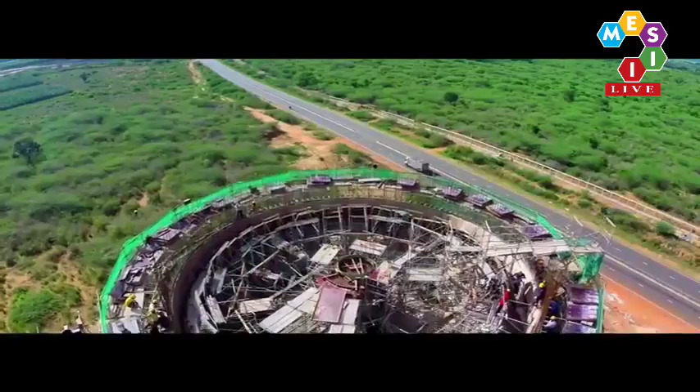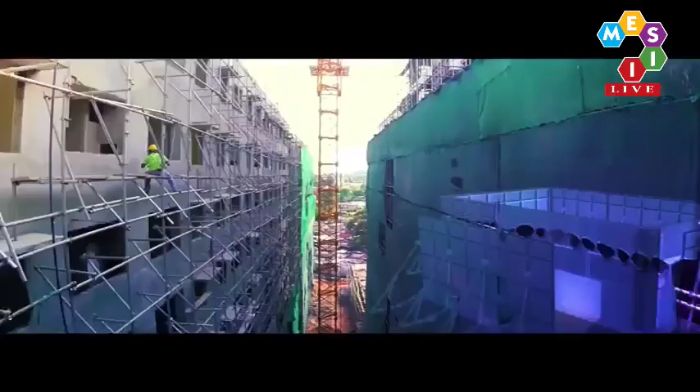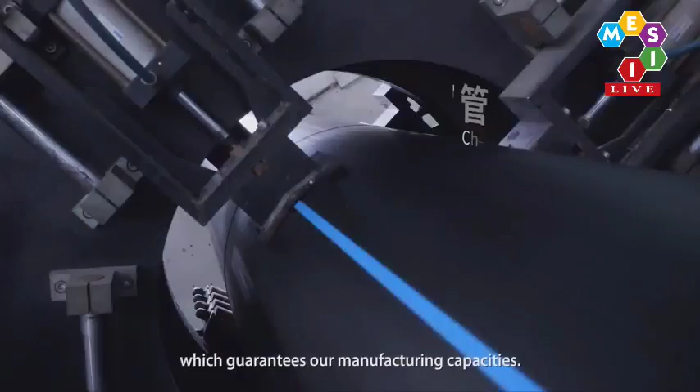The total quantity of our production equipment has been more than 3,800 units, which guarantees our manufacturing capacities. We can provide the market with a full series of products with calibers stretching from 16 millimeters to 2,400 millimeters.

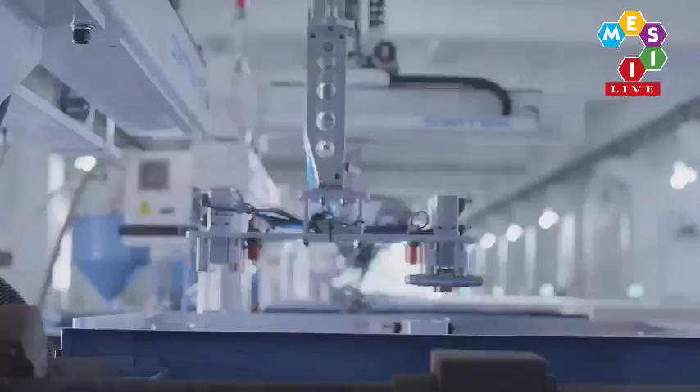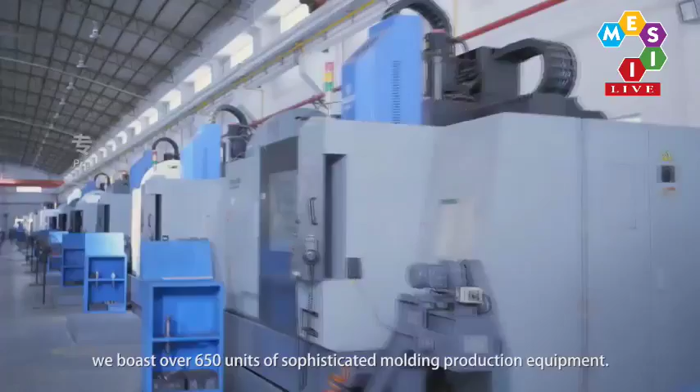Our annual production capabilities of plastic tubing and pipe fittings amount to 2.16 million tons. Over 650 units of sophisticated molding production equipment. Our annual production of molds exceeds 3,500 units.

By virtue of powerful scientific research strength, Lesso receives many national titles and honors, including National Recognized Enterprise Technology Center and Postdoctoral Research Workstation. So Lesso adheres to the brand philosophy of creating a relaxing life for dwellers by extending to

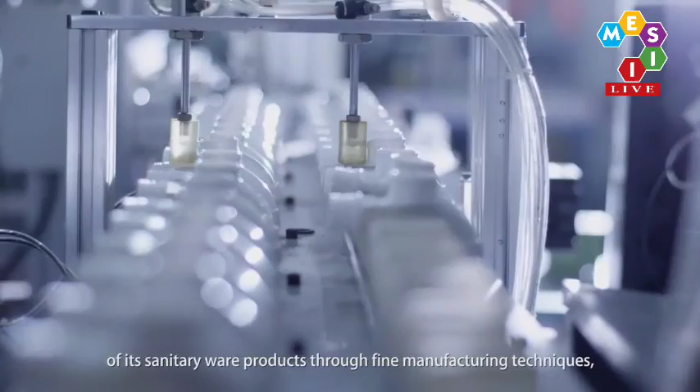the industry of building materials and interior decoration. Lesso is dedicated to enhancing the product quality of its sanitary ware products through fine manufacturing techniques, as well as bringing sanitary ware products with superior quality and taste to consumers.

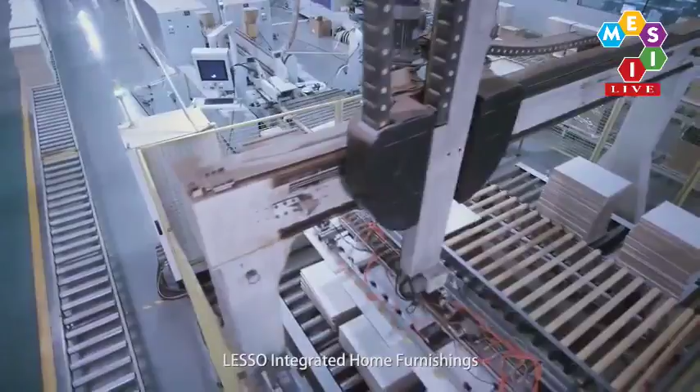By focusing on household and lifestyle requirements of consumers, Lesso Integrated Home Furnishings provides a full range of housing services, such as integrated kitchen and wardrobes.

Meanwhile, Lesso also operates a complete product line of building materials and interior decoration, including integrated doors and windows, decorative plates, integrated heating, water purifiers, and firefighting equipment. It comprehensively provides consumers with comfortable and satisfying housing services, provides integrated solutions of building materials and interior decoration.

In the future, Lesso will consistently stand at the forefront of the industry, gradually develop into a world-leading large industrial group of building materials and interior decoration, and create a relaxing life for thousands of families in China and the world.

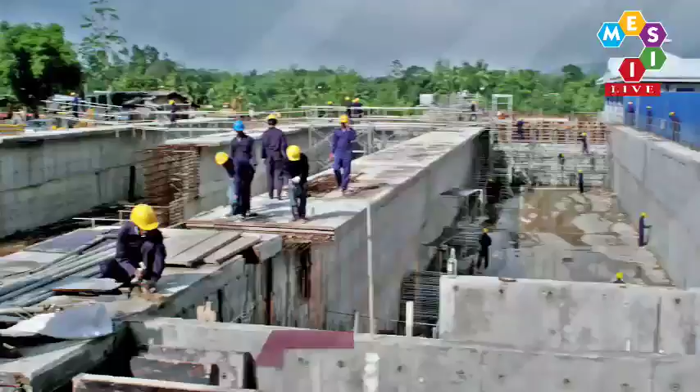The company will continue to be involved in building vital infrastructure around the country, contributing to the rapid economic development spearheaded by the government.

Our success story is well recognized. Today, we record the highest market capitalization in the construction and engineering sector. Whilst creating value to our stakeholders, we continue to enrich the motherland with our contribution for the well-being of generations to come.

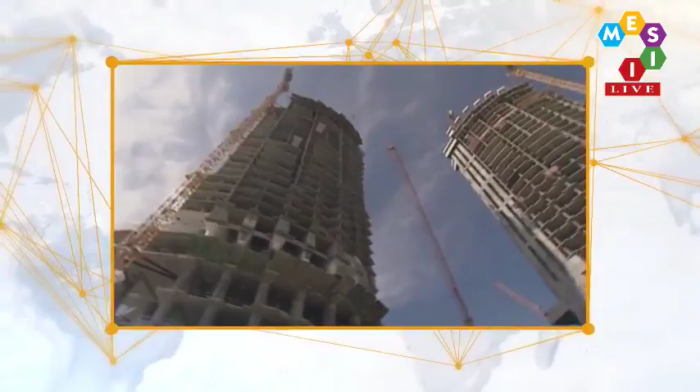Master Builders Solutions by BASF connects the entire global expertise and innovative strength of BASF to develop solutions for more than 30,000 clients everywhere in the world.

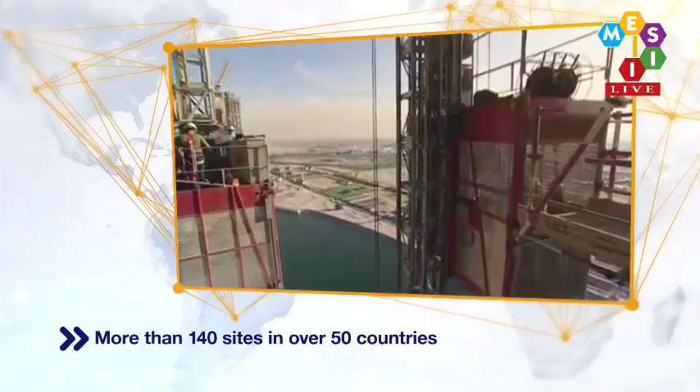Supporting more than 140 sites in over 50 countries, we receive and dispatch a customer order every 5 seconds on each of the 5 continents, being always close to our clients.

With Master Builders Solutions, we can bring our global expertise to each local point in the world, enabling our clients to benefit from more than a century of BASF's knowledge and experience within the construction industry.

We've led innovations and set standards for decades, and we will continue helping our clients to break records in construction with peak performances from the tallest buildings to the longest bridges in the world.

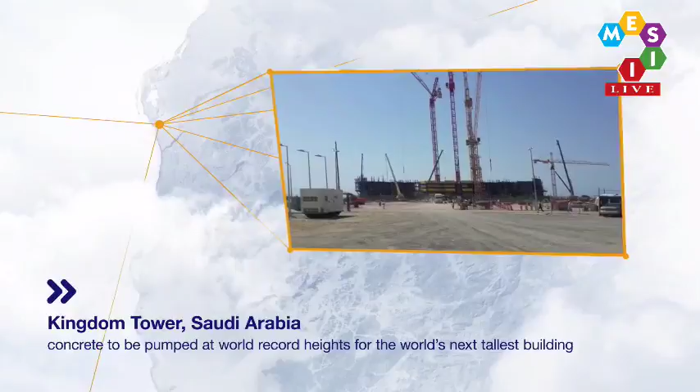With Master Builders Solutions, we support our clients in finding the most efficient and sustainable solution for each of their projects. But building a sustainable future needs more than just chemicals.

It needs good chemistry. We believe that only as a truly connected team across various functions, professions, and countries, and in close partnership with our clients, we will achieve results.

Whether it comes to technical services, long-term support, or yet unprecedented challenges, Master Builders Solutions from BASF is the world's most experienced and best connected partner for expert users of construction chemical solutions.

Master Builders Solutions from BASF. We create chemistry.

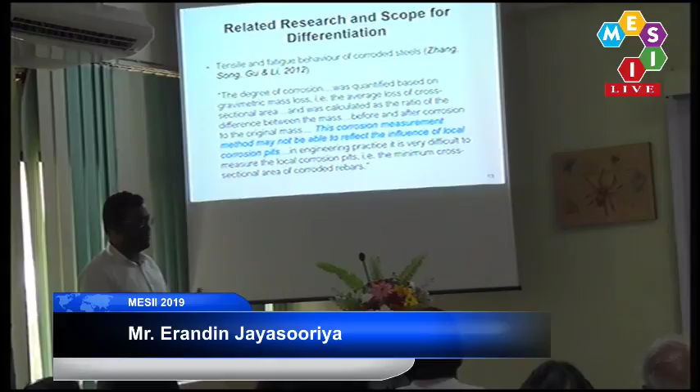And the research in this area is quite extensive and enthusiastic, because some of these research projects are 26 years old. It's amazing. They have been done in Eastern Asia, in the Middle East, in Greece, Central America. All of these researchers have mentioned this sort of problem that I was going to investigate, but they have not gone into the nitty-gritties because they realize the problem could be overcome with a safety factor. Any of you in structural engineering will know this. But they had mentioned that this corrosion measurement may not be able to reflect the influence of local corrosion pits.

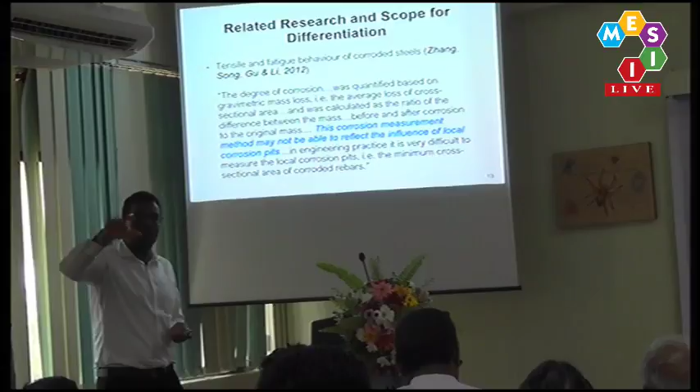Go back 2 slides if you can, please. Yeah, there. So essentially, they have mentioned that this has an effect, but that they could not determine what said effect was. 3 slides. 1.

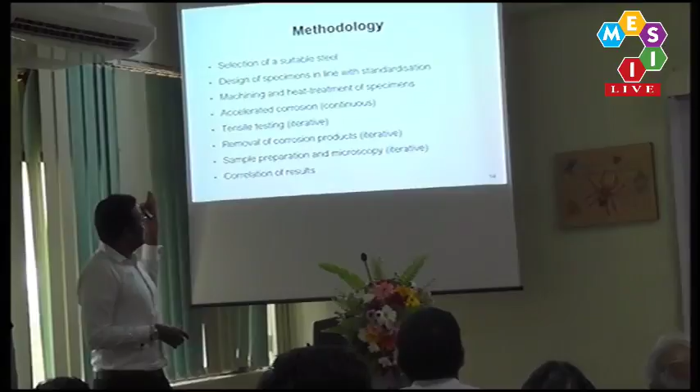Thank you. So the methodology of my project, I shall not run through all these sections because it's boring and it'll take a lot of time. But it was quite an extensive methodology. I had to do quite a lot of research. And the real important bit is the correlation of results at the end.

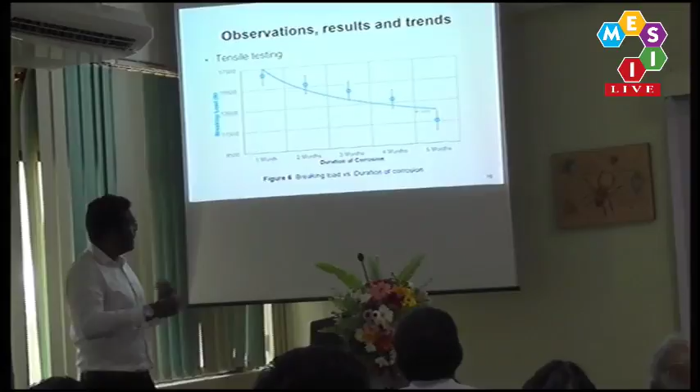This should be an intuitive table for you, because the breaking loads ought to go down as time passes and it corrodes. That should be obvious. And so does the extension at fracture, and as is this relation. But I'll come to these graphs a bit further on, in a sort of amalgamation of 2 or 3 graphs together.

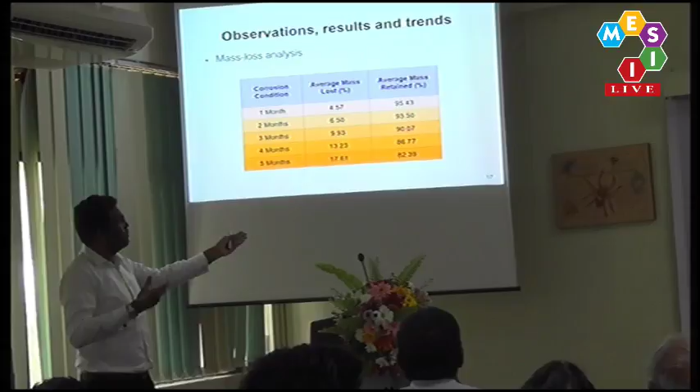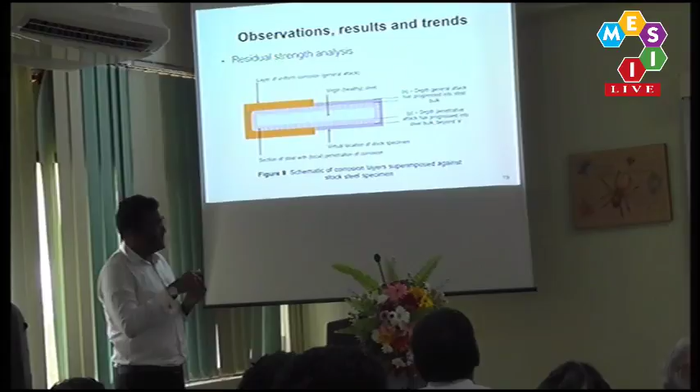I'll spend a bit of time on this slide. Now I have included the hypothetical initial steel section. You will wonder why the rust goes up and down. Obviously, rust is less dense than steel, but we are not interested in the bit that goes up. We are interested in the bit that goes in. That is the so-called general attack, and this is what I call the penetration of corrosion. So we wanted to see, in relation to that X value, how significant the Y value is.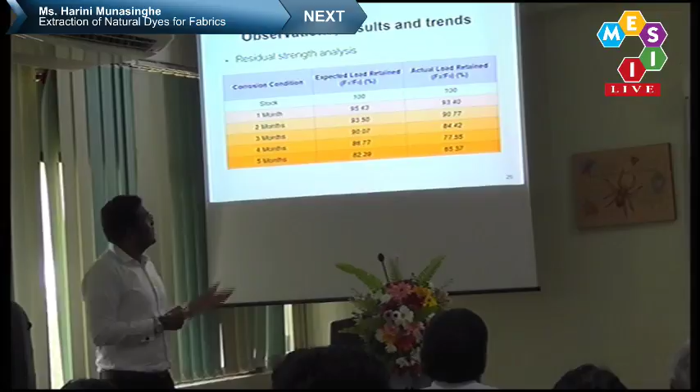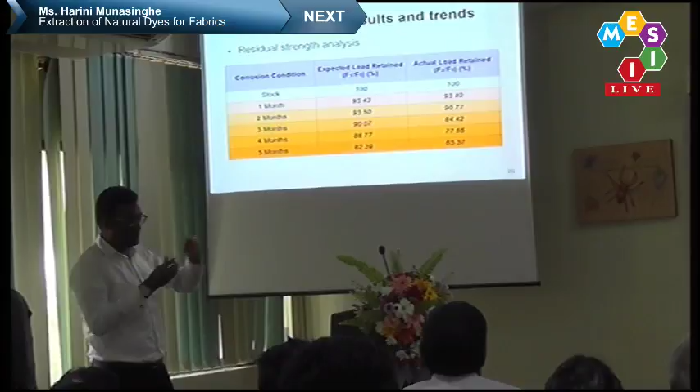To correlate this to my project title, we needed an idea of the expected versus actual load retained. The expected load retained is essentially the mass retained, because it is assumed to corrode equally from all sides, and therefore once the mass is lost, the load is lost, the cross-section is lost.

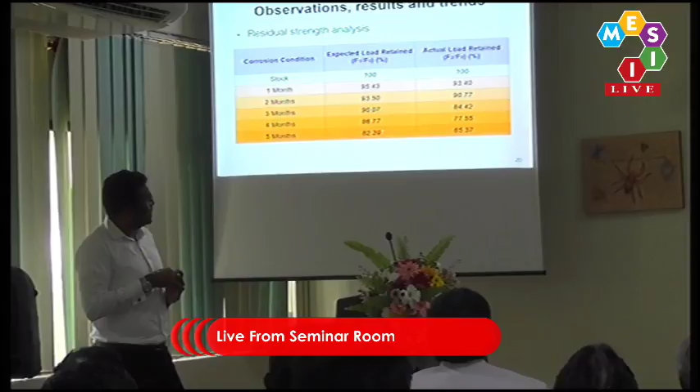Whereas these are my actual readings, and especially in the first and second month, the correlation the researchers in the thesis described does exist, it's very similar. But once you get to the last month, there is a loss of 18% here and 34% here, nearly twice. That is significant, and I'm not entirely sure a safety factor can cope with that.

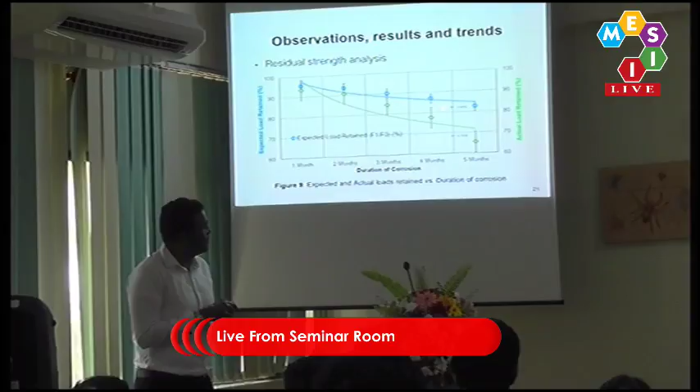And this is the sort of relation we saw. So going by the enlightened research of the world, this green curve should hug this blue curve, perhaps with a 105% or 110% correction, whereas this deviates quite significantly as it goes further down.

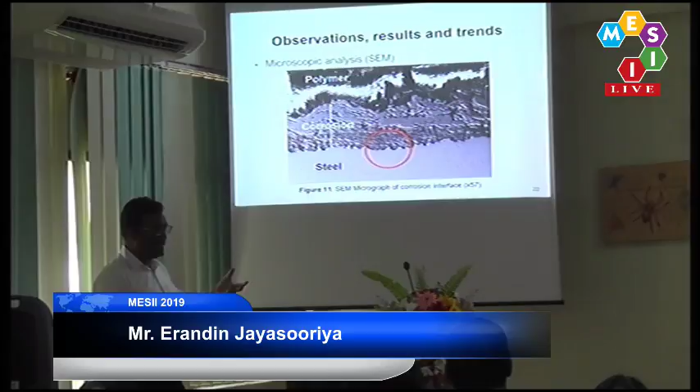To study the sort of incisions I mentioned, we conducted scanning electron microscopy in our SEM. This is the macro shot. You see the polymer layer on which my sample is mounted, this is the bit of general corrosion, this is the steel, and this is the layer of incisions.

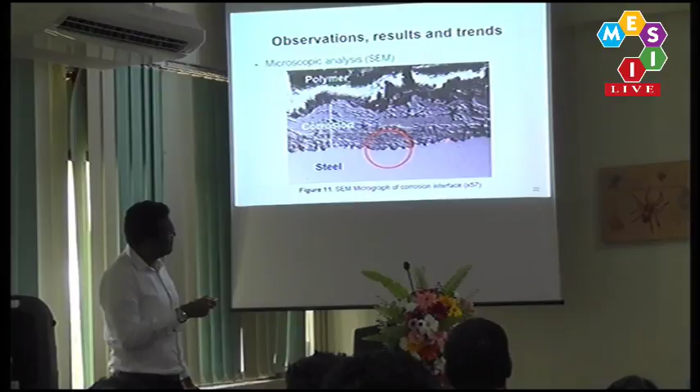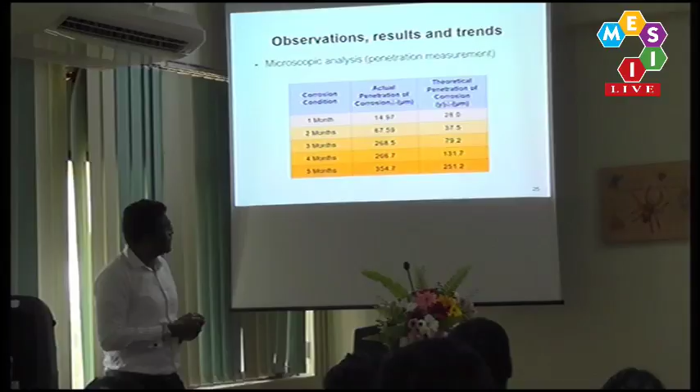This is the measurement of my microscopic analysis, these are the actual depths I got. The theoretical depths can be reverse calculated from the graphs shown earlier where there was a disparity, so the disparity is alluded to a certain depth that goes in from all four sides.

This is pretty similar, we were amazed, this showed quite a correlation. I think the third month is rather anomalous, but that is to be expected because the corrosion pits are local and this is not a foolproof method.

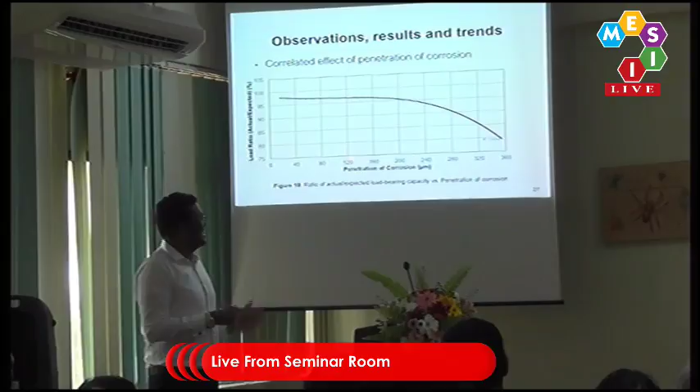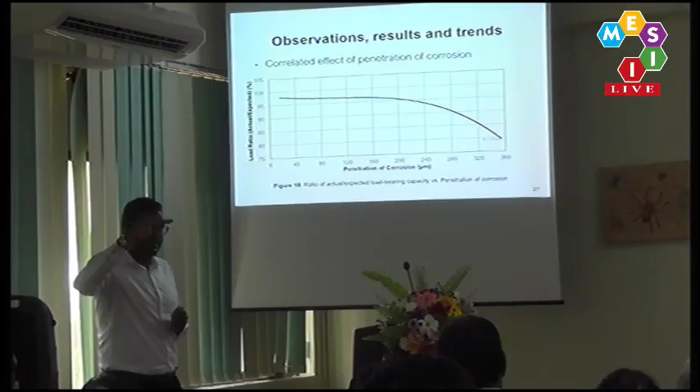This is the crux of my research. I assume I have proven that the penetration of corrosion is inversely proportional to the load ratio. If we were to go by the research hypotheses of the world, this ratio ought to have existed between 100 and 95, somewhere here, because as soon as the incision goes in, the general layer ought to follow. That should be the natural assumption.

But we found out that it wasn't. It deviated quite significantly the further the penetration of corrosion went in, and this penetration kept increasing without the general layer following. That was quite an amazing feat. I have removed the data points because that third anomaly makes the graph rather ungainly.

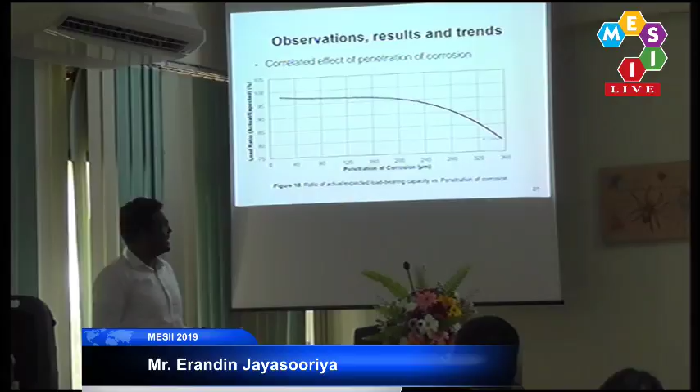But yeah, these are the conclusions I reached. Obviously, the expected versus actual loads are different, that was a real eye-opener. More importantly, we could successfully prove our hypothesis that this disparity in the two loads was relevant to the penetration of corrosion. There might be other factors as well, but we started with this factor and it showed quite a nice proportionality.

There are quite a few limitations to this project, as the academic staff pointed out to me throughout the progress reviews. The most obvious is that it was done in a corrosion chamber in a really high salt atmosphere, which had to be the case because I only had a year to do this project. But in a general corrosion situation, like in your house or office building, this might be quite different.

Perhaps general corrosion progresses quite slowly without the incision going deeper after all. And the measurement was done in a rather linear sense, whereas the actual penetrations can take a curve, a hook, and any number of shapes.

If someone were to optimize that, I'm sure they'd get a much closer result in the curve that showed the deviation. The last recommendation is that someone make a phase-wise study, superimposing the ferrite versus the pearlite to see if that makes a difference, because ferrite is more conducive to corrosion, that's well known. There is another recommendation not mentioned here, which was followed by my juniors, and they developed this project to a much higher degree, but I'll answer that in questions and answers if you're interested. Thank you very much.

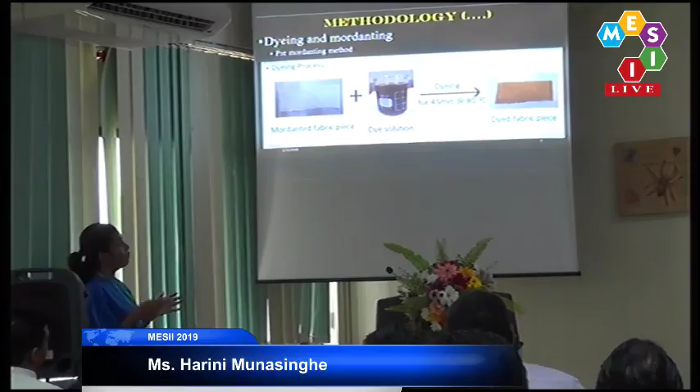We also carried out the mordanting process under three different methods. The first is the pre-mordanting method, where we first did the mordanting process using tannic acid treated fabric piece, then did the dyeing process for the mordanted fabric piece to obtain the dyed fabric piece.

The second method is the simultaneous mordanting method. Here, instead of doing dyeing and mordanting separately, we did both processes at the same time for the tannic acid treated fabric piece, and obtained the dyed fabric piece.

The third method is the post-mordanting method. Here we first did the dyeing process, then did the mordanting process for the dyed fabric piece, and obtained the mordanted dyed fabric piece.

After the dyeing and mordanting process, we needed to test the fastness properties of the dyed fabric piece. For that, we tested the fastness properties using ISO standard methods for washing fastness, rubbing fastness, perspiration fastness and light fastness tests.

After testing the fastness properties of the dyed fabric piece, we tested the color strength and color hue values using a data color spectrophotometer. The specific color of the dyed fabric can be found based on the LAB color coordinate value.

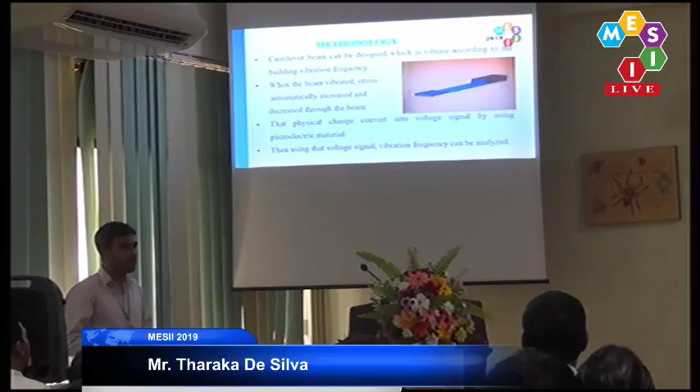In here you can see how the beam responds to vibration. This is my piezoelectric material. According to the vibration, it creates an electric field. There are a lot of equations behind my project.

I have mentioned two equations only. The first equation can be used to determine the natural frequency of the beam. Then this equation can be expressed for the electric field generated in a piezoelectric ceramic.

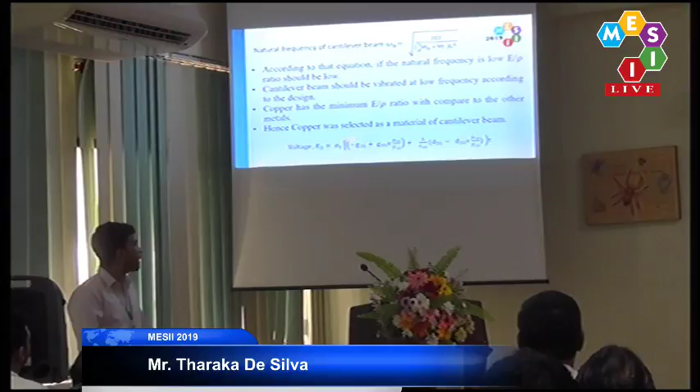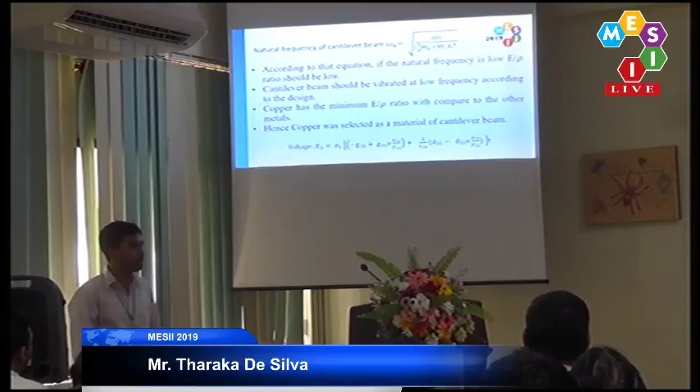There are a lot of constants. They can all be taken from the property table of piezoelectric ceramics. First we did the software mathematical modeling, but we wanted to improve the accuracy of the result, so we did the software simulation. Therefore we use the COMSOL Multiphysics software.

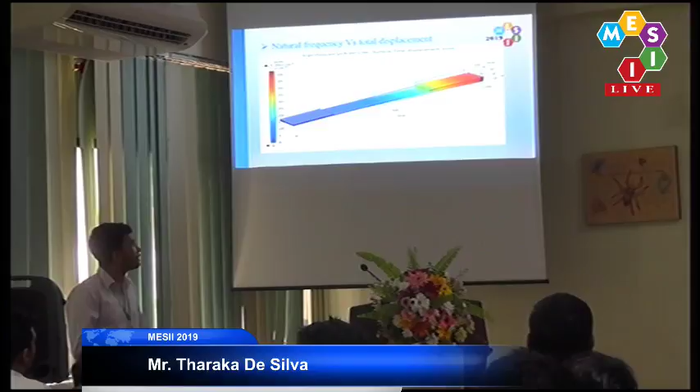Then this figure shows you how the total displacement of the sensor varies along the cantilever beam. You can see this end has a higher displacement. This place is constant.

This figure shows you the stress distribution of the sensor. We want to check the stress distribution because it can undergo yielding, and we can't use it as it is.

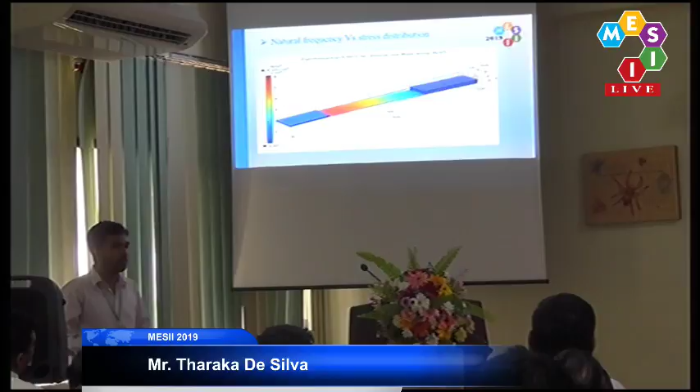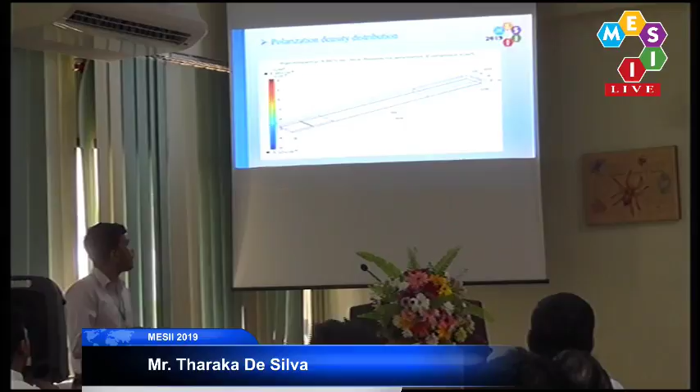This is the most important part of my project because we measure the electric field in a piezoelectric ceramic in the z-axis. This figure shows you how the electric field varies in the piezoelectric ceramic.

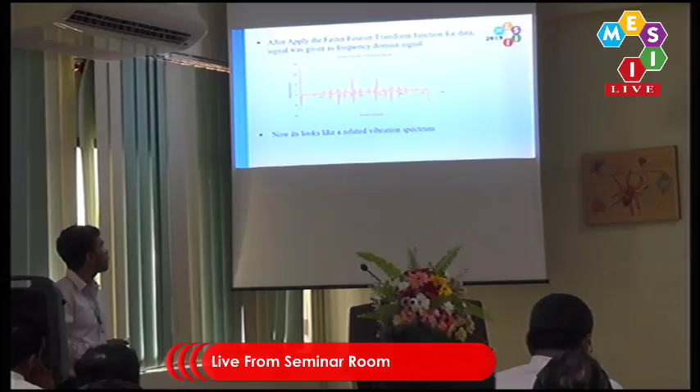During the Fourier transformation, the time domain signal converts into an electrical frequency domain signal. Then we can say what is the frequency of signal and amplitude of signal. This graph shows you the fast Fourier transformation of the signal.

In here I cut off that range and that range because they are not in the cosmetic damage range. This is the most dominant frequency according to my application. According to that graph I take the frequency and amplitude.

Then if we know the frequency and amplitude, we can say what is the velocity, acceleration, and peak particle velocity of vibration. Peak particle velocity means velocity related to the maximum amplitude of the sensor.

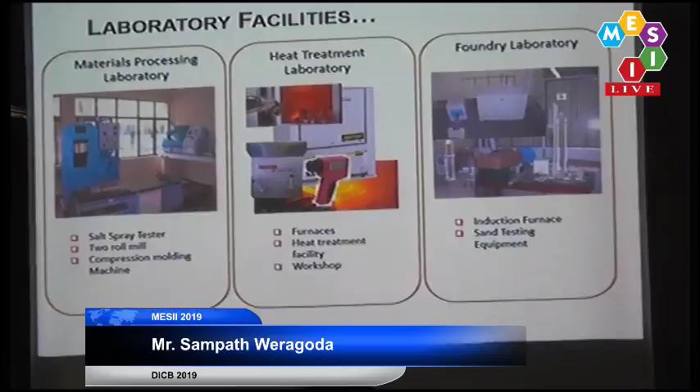Our equipment are all up to date and in prime working condition. These are some of the other facilities in our laboratories. We have the materials processing laboratory, the heat treatment laboratory, and the foundry laboratory. The reason I am emphasizing the laboratories and equipment is mainly because, unlike in most other fields of engineering, we cannot do anything with materials engineering unless we have good equipment and lab facilities. So we have always strived to keep our laboratories up to date and well equipped.

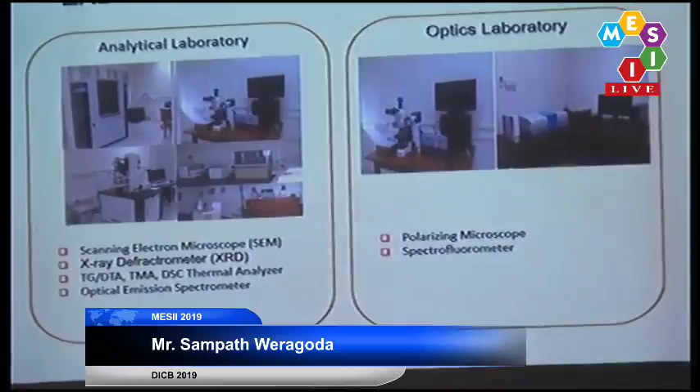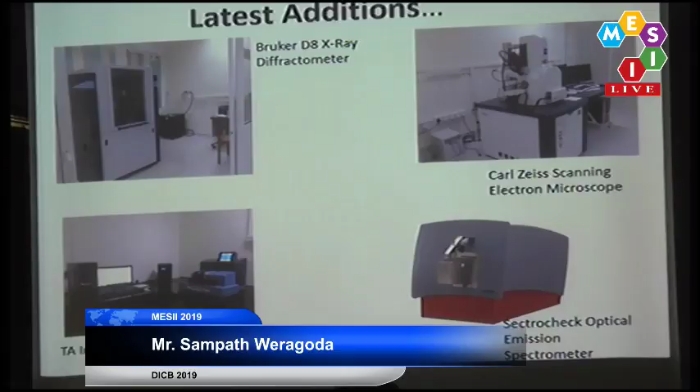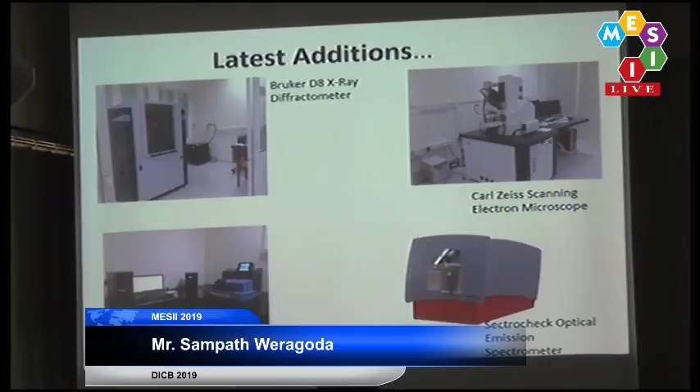And these are actually our latest additions to the equipment facilities. So all these equipment facilities are available for anyone who is interested, and we will be happy to provide our services in materials analysis and testing.

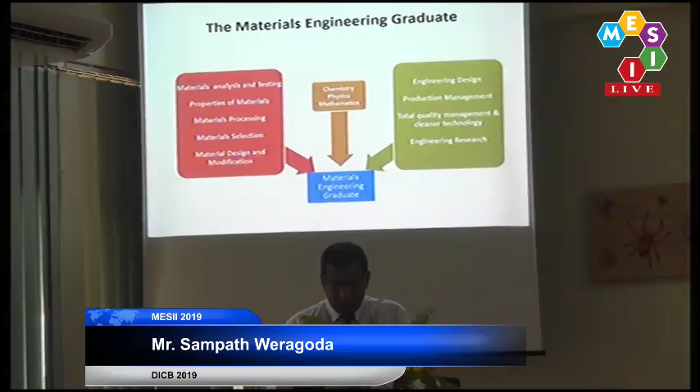So just to highlight what a materials engineering graduate consists of, it is basically as given in this picture. These are the inputs that we give to our graduates. They start with chemistry, physics, and mathematics knowledge from the advanced levels, and we give them further knowledge on those subjects as well, plus the materials engineering subjects and the general engineering knowledge. So these are our inputs to the graduates passing out from this department.

So normally, up to now, we don't have a particular designation called the materials engineer in most of the industries, except for a few establishments.

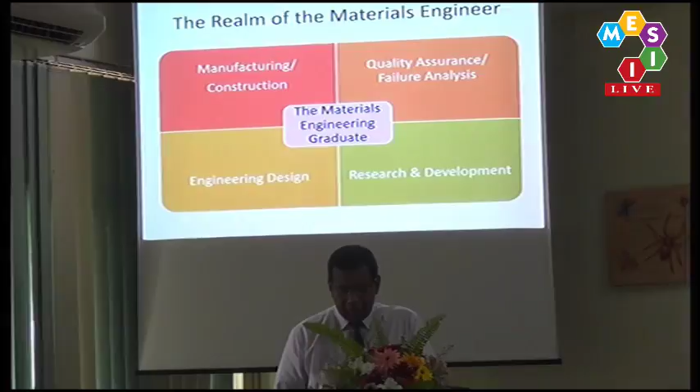This is the general area in an establishment where we expect our graduates to perform. However, the focus will be more on research and development and quality assurance when it comes to the knowledge of the engineering graduates.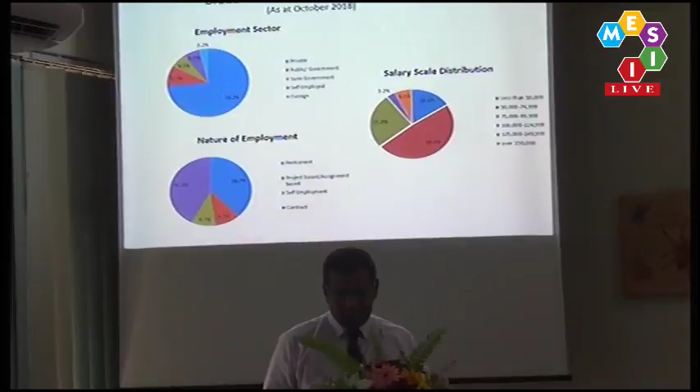These are some statistics of our graduates taken at the last convocation, but unfortunately we couldn't get a 100% picture because most of them did not contribute to the statistics. So this is a result of about 35 graduates out of 50.

This picture is not totally different from most other fields of engineering in University of Moratuwa, so the figures are almost the same for chemical engineering, mechanical engineering, material science and engineering, and even electrical engineering.

So I will brief you about our postgraduate programs as well. We have a postgraduate degree program in material science, which is a taught program, and we are planning to introduce the master's program in nanotechnology this year. We have already got approval from the UGC, and also we have master's and PhD degrees which can be carried out by research in the department.